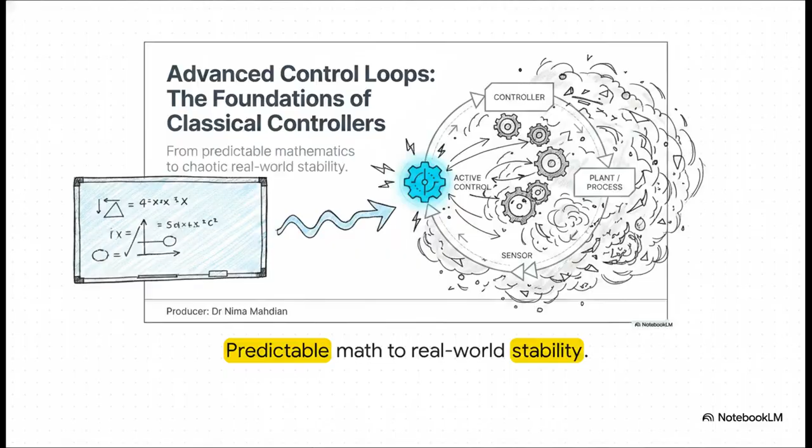Here's a quick look at our agenda for this explainer. First, the core objective. Second, the open loop problem. Third, enter the feedback loop. Fourth, the mathematics of control. Fifth, the 3 superpowers. And finally, number 6, the cost of autonomy.

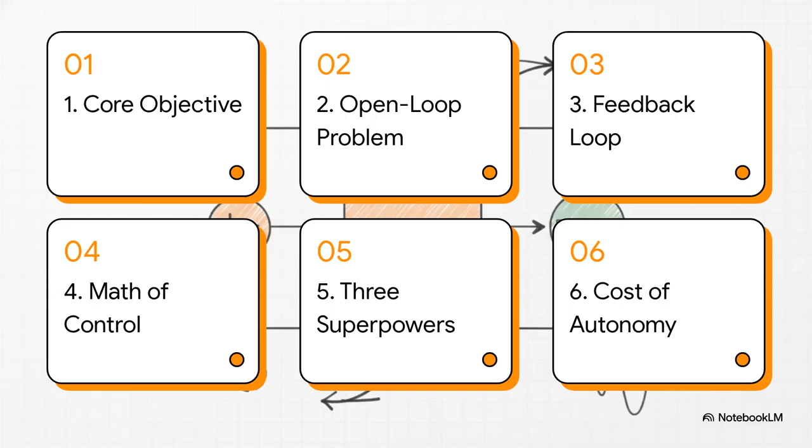All right, section 1, the core objective. Feedback systems are basically the invisible hand of modern industry. The principles we're talking about aren't just abstract math exercises stuck in a textbook somewhere. They're the vital, inseparable core of how things actually get made and done.

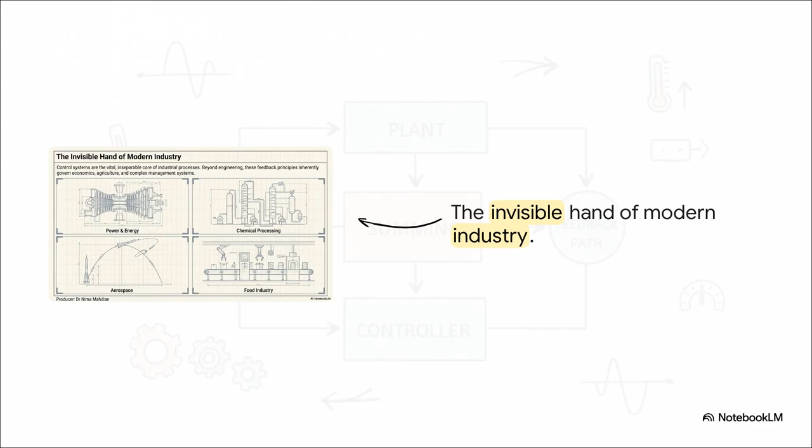Whether we're talking about massive turbines generating power, the crazy complex piping and chemical processing, the pinpoint precision you absolutely need for aerospace rocket launches, or even automated assembly lines pumping out food, these control principles are the common denominator keeping it all running. Now, the core objective boils down to 3 crucial variables.

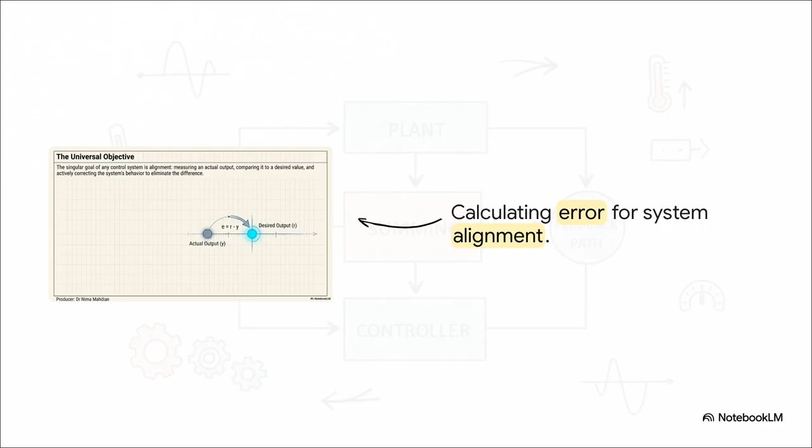We have R, which is our reference, or what we actually want to happen. Then there's Y, the actual output, where the system physically is right now. And the space between them, that's E, the error. The singular, relentless goal of any control system is to completely obliterate that difference. It calculates the error and just fights to push Y directly on top of R.

That's the whole game. Moving on to section 2, the open loop problem. So let's look at paradigm 1, the open loop system. I like to call this execution without observation.

Imagine a blindfolded archer. Sure, they can calculate the wind and distance perfectly beforehand, but once that arrow leaves the bow, zero course correction. If a gust of wind hits, they're gonna miss.

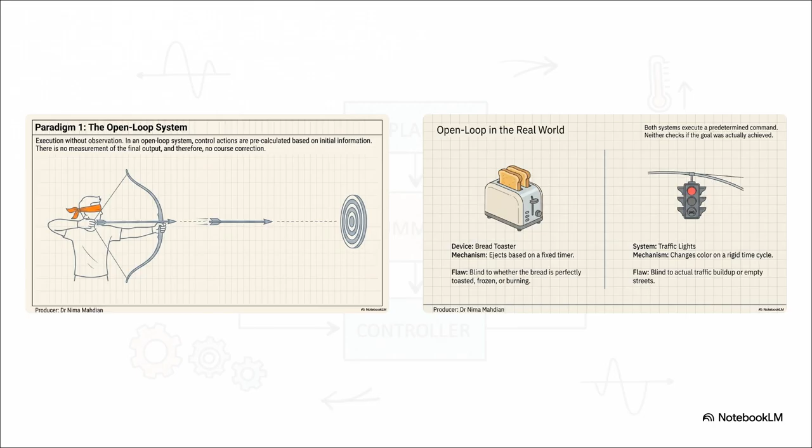This is exactly how everyday devices work. Think about your toaster. It pops the bread out based on a rigid timer. It's completely blind to whether your toast is perfectly golden brown or literally catching on fire. Or a traffic light. It changes colors on a set cycle, totally oblivious to whether the intersection is completely empty or backed up for 5 miles.

And that brings us to the real vulnerability here. Imagine we have our blind command sending out effort to run a process, but suddenly, boom, an external disturbance, let's call it D, strikes the system like a lightning bolt.

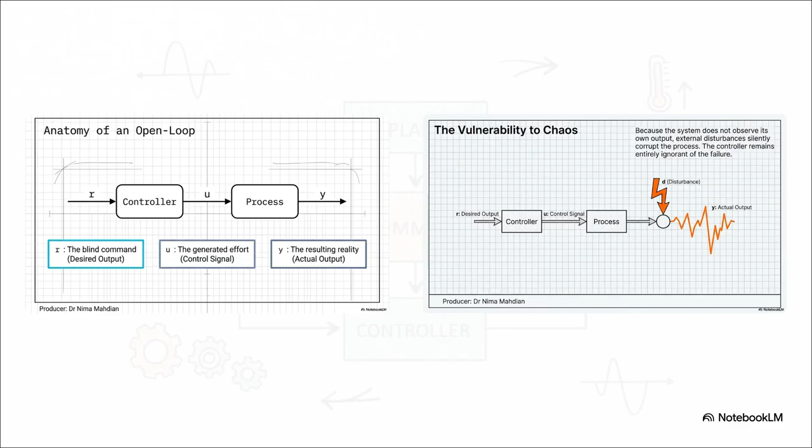Because an open loop system doesn't bother to observe its own output, that external disturbance silently and violently corrupts everything. The controller is completely ignorant. It just keeps sending the original command, blissfully unaware that the whole system is actively failing.

Okay, section 3. Enter the feedback loop. Welcome to paradigm 2, the closed loop, or feedback system. This is the real game changer because we are finally introducing self-awareness.

Unlike our blindfolded archer, a feedback system acts way more like a modern guided missile. By continuously measuring what it's outputting and feeding that info right back to the start, the system gains this incredible ability to dynamically adapt to chaos.

It doesn't just cross its fingers and hope to hit the target. It constantly evaluates the environment and makes rapid course corrections on the fly.

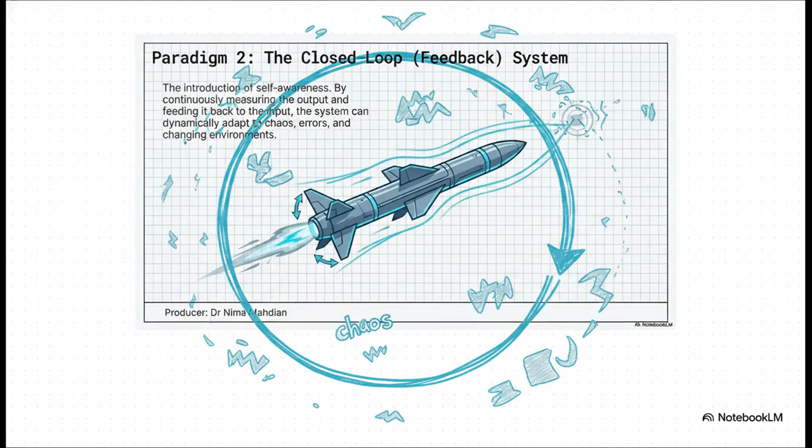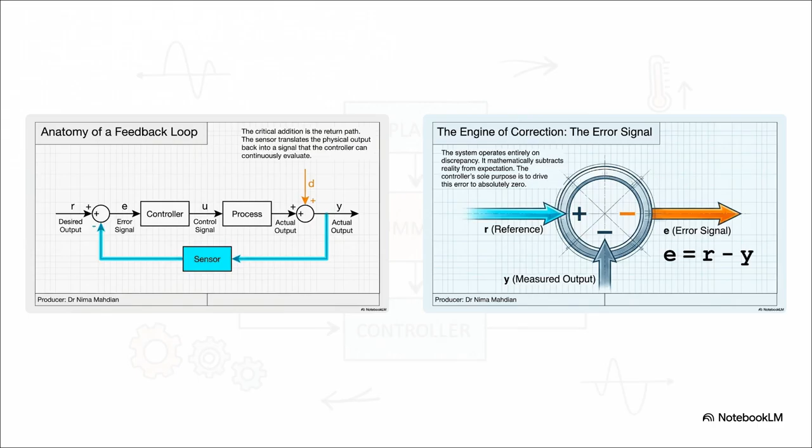Let's do a really quick diagnostic comparison to recap. Open loop: no measurement, and it totally fails when external disturbances hit. But on the plus side, it's cheap to build and inherently stable by default.

Now the closed loop actively compensates and neutralizes chaos using continuous sensor measurement. But of course, that comes at a cost. It's highly complex, requires expensive hardware, and introduces a brand new risk. If you design it poorly, it can actually become violently unstable.

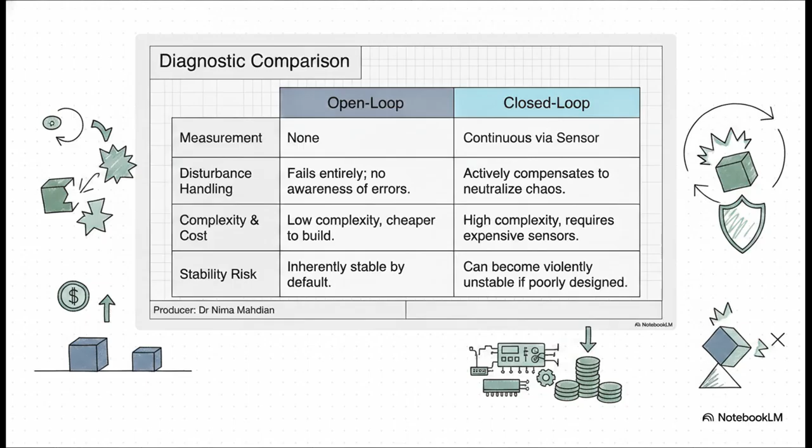Which perfectly leads us into Section 4, the mathematics of control. Before we dive into the heavy equations, I want you to anchor yourself in actual physical reality for a second. Think about a gear in a machine. Over time, the physical parameters of literally any system are going to change. Motors run hot, friction kicks in, environments shift, and a pristine, shiny piece of metal eventually turns into a rusty, degraded, worn-out part.

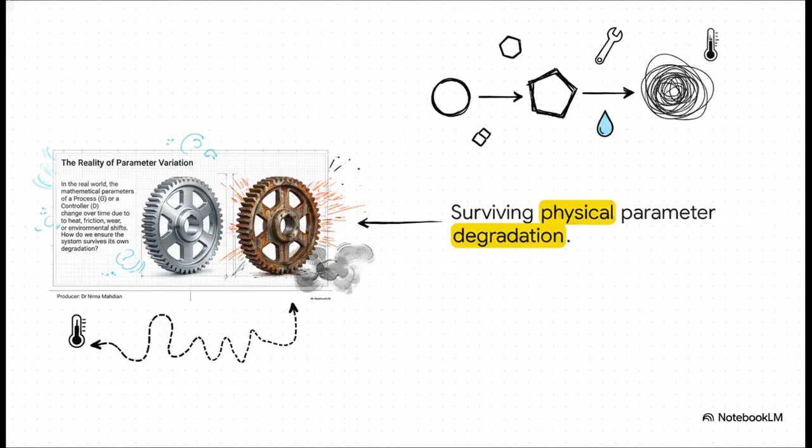If our original math relied on that pristine gear, how on earth do we guarantee the system still works flawlessly decades later when it's all rusted out? Well, here is where the math gets absolutely beautiful. In an open loop, you're directly vulnerable. If your physical process degrades by 10%, your final output degrades by exactly 10%.

There is zero protection. But check out the closed loop equation. That return loop actually creates a mathematical denominator, 1 plus D of s times G of s. This is what we call the feedback shield. If we design the controller D so that its gain is massively large, that 1 in the denominator basically becomes negligible, so the D and G on the top and bottom effectively cancel each other out. The math magically simplifies, meaning our output is virtually equal to our original reference. The system literally ignores its own physical degradation.

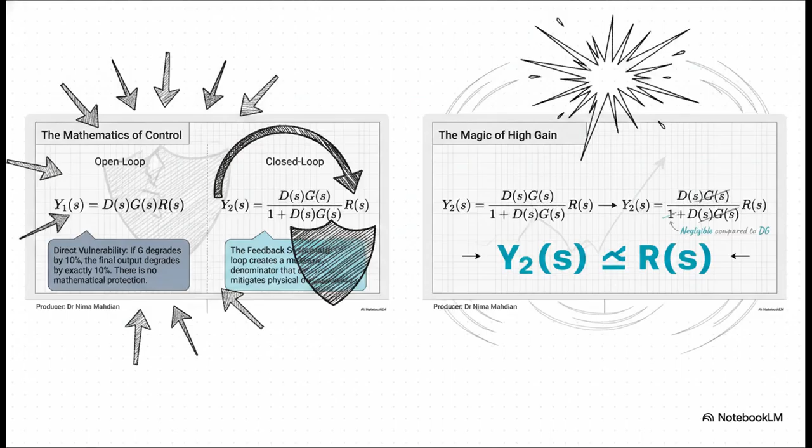How cool is that? All right, Section 5, the 3 superpowers. Let's see what this math actually buys us. Superpower number 1, disturbance rejection. Remember that lightning bolt of a disturbance from the open loop system?

Well, in a feedback system, when a massive wave of external chaos slams into the process, the sensor instantly detects the spike in the error. This forces the controller to immediately fire back with an equal and opposite response, effectively neutralizing the chaos before it even has a chance to ruin the final output.

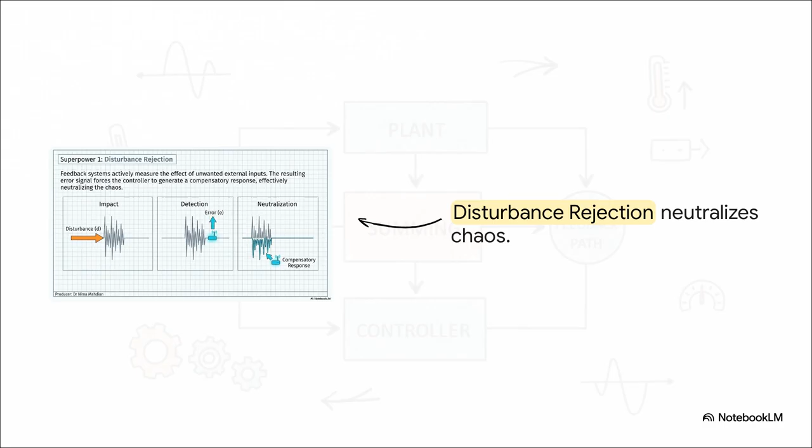Superpower number 2 is handling model uncertainty. Look, as engineers, our mathematical models of a motor or a chemical reaction, they're always just rough approximations. They are never 100% perfect. But feedback acts as this incredible engineering safety net. It totally forgives our imperfect math, allowing the system to function with extreme precision in the real physical world, even if our foundational models were just kind of ballpark estimates.

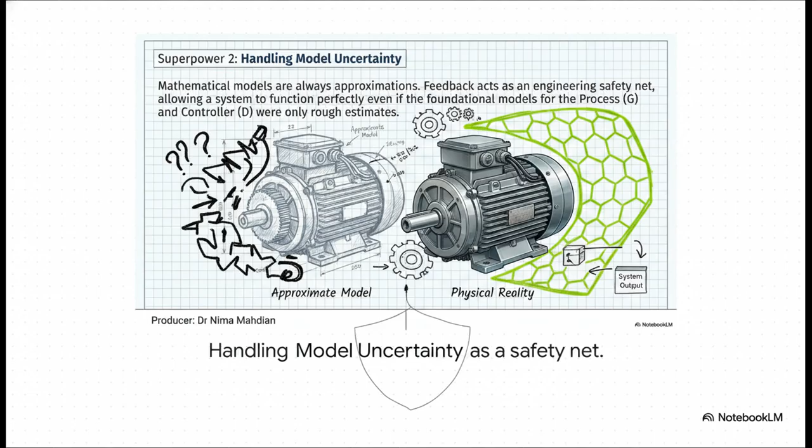And superpower number 3, taming process instability. Some physical processes are fundamentally unstable by their very nature. They will fail catastrophically if you try to use an open-loop control. Think about trying to balance a tall rod on the tip of your finger. It constantly wants to tip over and fall, right? A well-designed feedback loop processes that falling motion so incredibly fast that it generates a counter-movement, literally forcing mathematical stability onto mechanics that are inherently chaotic and unstable.

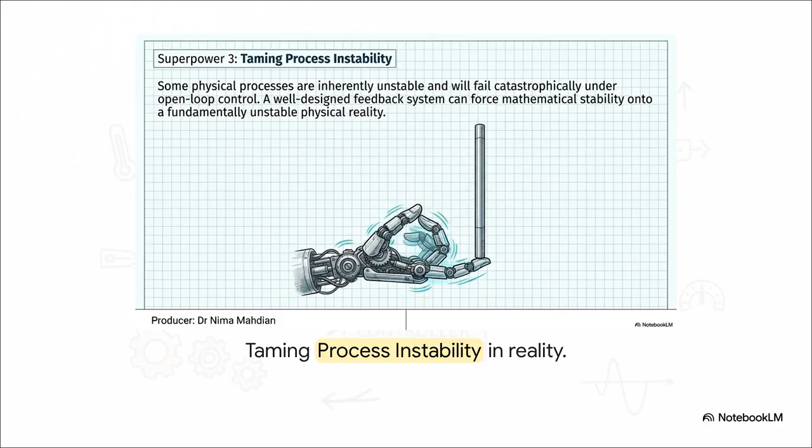Finally, Section 6, the cost of autonomy. Of course, in engineering, superpowers always come at a price. It's a strict architectural trade-off. On one side of the scale, yes, we gain incredible capability, intelligent adaptation, and error neutralization. But on the other side, we're looking at massively increased design complexity and much higher manufacturing costs, simply because you suddenly need these incredibly precise, expensive sensors.

And then there's the paradoxical risk. If you tune a feedback loop poorly, you can induce a delay that causes the system to overcorrect. You can actually introduce severe violent instability into a system that was perfectly stable to begin with.

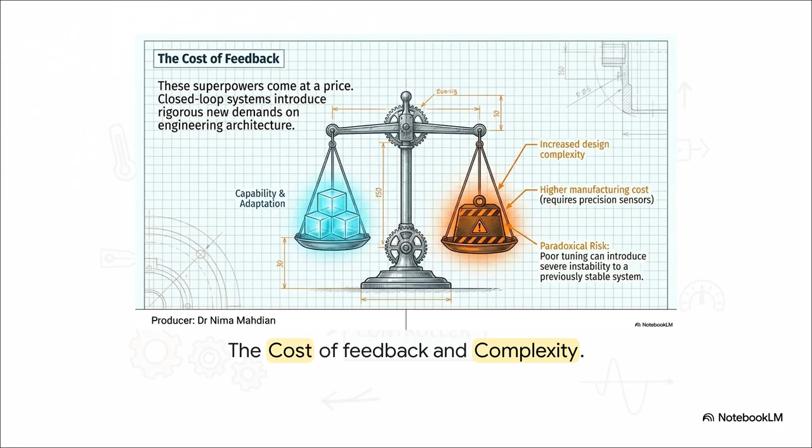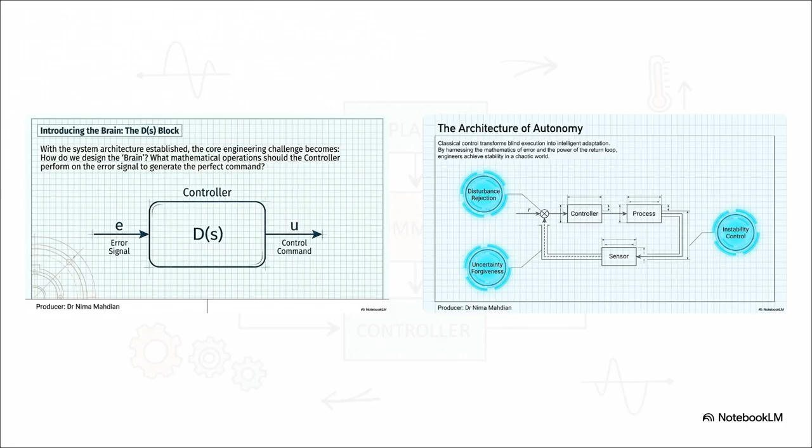By mastering that D of s block, engineers can harness the mathematics of error and the sheer power of the return loop to actually achieve stability in a totally unpredictable world. And that is the foundation of classical controllers in a nutshell.

To wrap up this explainer, I want to leave you with a final thought to really reflect on, not just for engineering, but honestly for any complex process you manage in life. Look closely at the systems around you. In a world of ever-increasing chaos, is your system rigidly designed to just blindly execute until it completely fails? Or is it designed with the critical feedback loops necessary to adapt, correct, and survive?